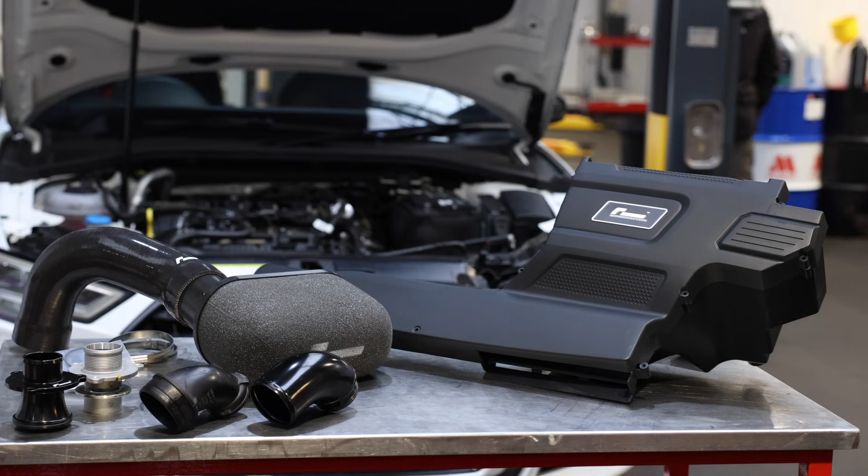Today we've got this S3 8V in with us for our Stage 2 package. On this particular car we're fitting a Revo front mount intercooler, an R600 intake package, a Scorpion sports cat downpipe along with some NGK race plugs.

Once the parts are installed, the car's going to be going into the dyno cell and we're going to be doing our Stage 2 ECU and TCU tuning. So let's get the car apart and let's get cracking.

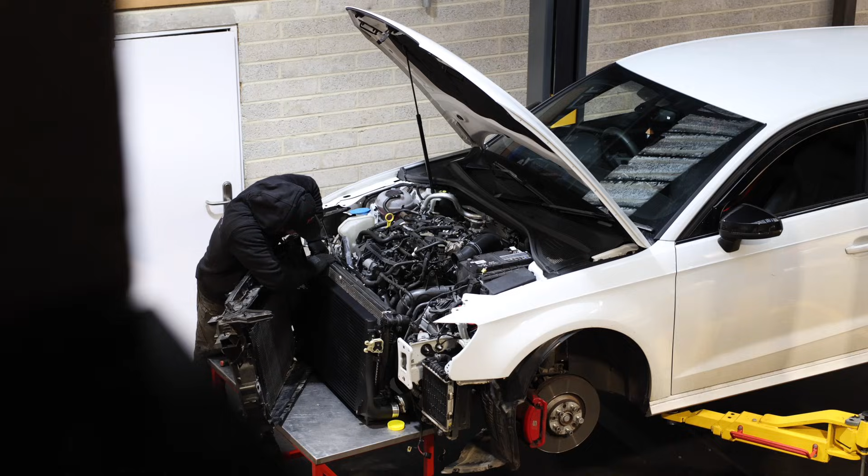Right guys, so the intercooler's installed now and it's time to fit the R600 intake package. This intake is one of our favourite intakes for the MQB platform. It performs the best and it's got a good, well-designed air box to keep intake temps down. So this kit comes with the Racing Line turbo muffler delete.

So the stock turbo in the compressor cover has a turbo muffler. This is designed to basically quieten down the noise from the turbo, but what that causes is turbulent air through the boost pipes, and it's actually slightly restrictive. So Racing Line have made this one-piece billet version, which is basically a straight through hole, so you don't get any of that turbulent air and you've got increased airflow.

So that actually does aid turbo response, and same with the turbo elbow. The stock turbo elbow is plastic, and you can see that it's very restrictive on that bend. With the Racing Line one, we've got a nice flowing 90 degrees, so the air going into the turbo can travel at a decent pace and it's not getting bottlenecked by that disgusting bend on the stock one.

So that being said, we're going to get the intake installed on the car and then go from there, so let's go.

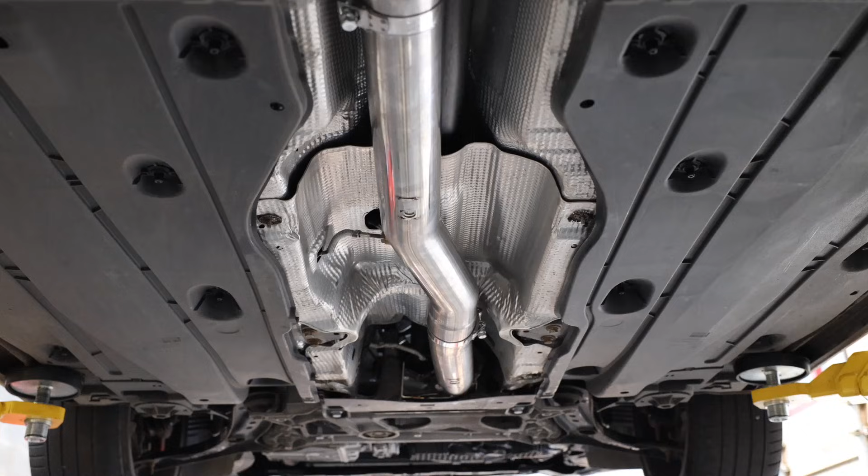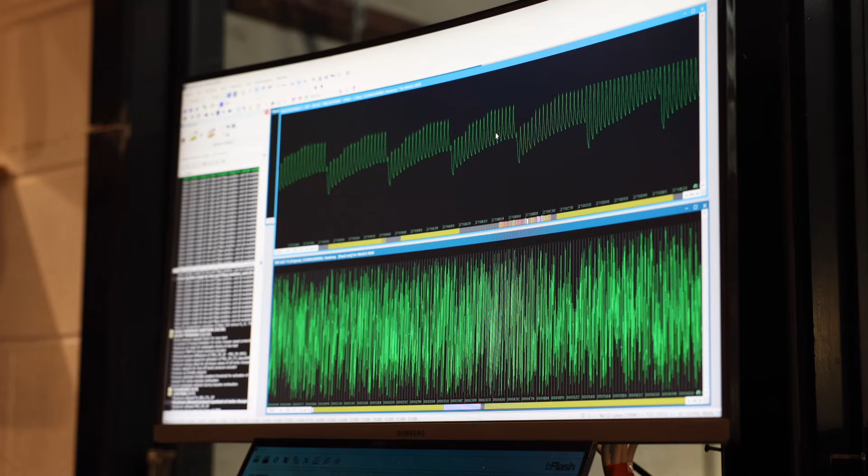Right guys, so we're going to start making a base map for the S3. What you can see on screen is a full DAMOS file for a Simos 18. That is the ECU that controls the S3 engine. As you can see, it's got like 50,000 maps inside this DAMOS file. We don't need to use all of them.

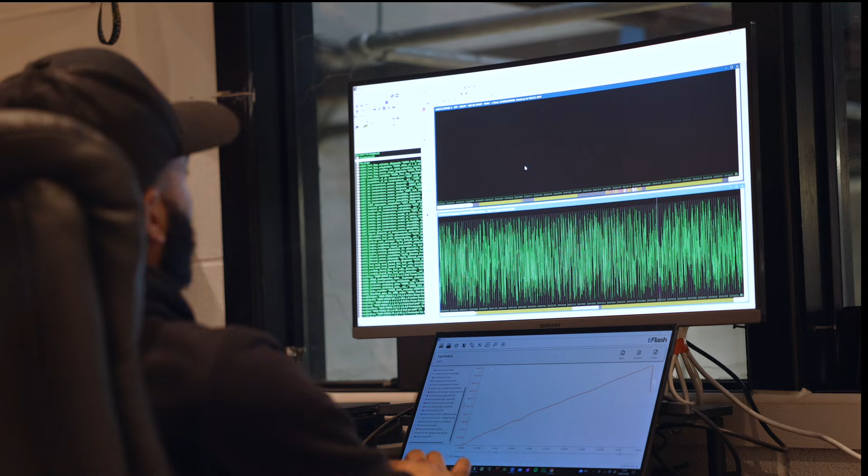So what I can do is make a tuner map pack for myself to make the tuning process a lot easier and easier to navigate the maps. So I've made a base file. I've limited the boost pressure to 1.5 bar just to get this car up and running on the dyno, make sure it doesn't have any issues, make sure it's holding boost properly, and then from that point we can start optimizing it. We'll raise the boost pressure, add some timing where needed, and we can go from there.

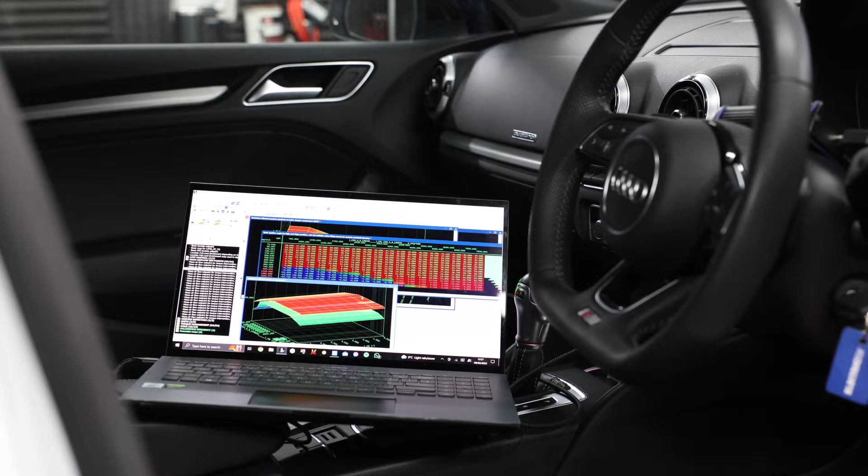So we can get this base map exported out of WinOLS, flashed onto the ECU on the car, and then we can do the first baseline pull on the tune. So let's go.

Right guys, we've finished tuning the S3 now. This particular car ran 315 brake horsepower and 313 foot-pound of torque in stock form. Obviously then we've done our Stage 2 package with the Revo intercooler, R600 intake package, a Scorpion sports cat downpipe and some race plugs.

First of all, I made a base file for this car, just running at 1.5 bar, nothing too crazy. Stock ignition timing, just as a base, just to see where we are with this particular car. And straight off the bat, it made 380 brake horsepower and 410 foot-pound of torque.

Since then, we've done another 6 or 7 revisions, dialing in the boost curve, optimising the ignition timing and fueling. So we've managed to add a bit of timing, sent the boost up to about 1.65 bar at peak, and it's making good power. The weather is on our side today. It's actually snowing outside, so the intake temps are nice and cool in here today.

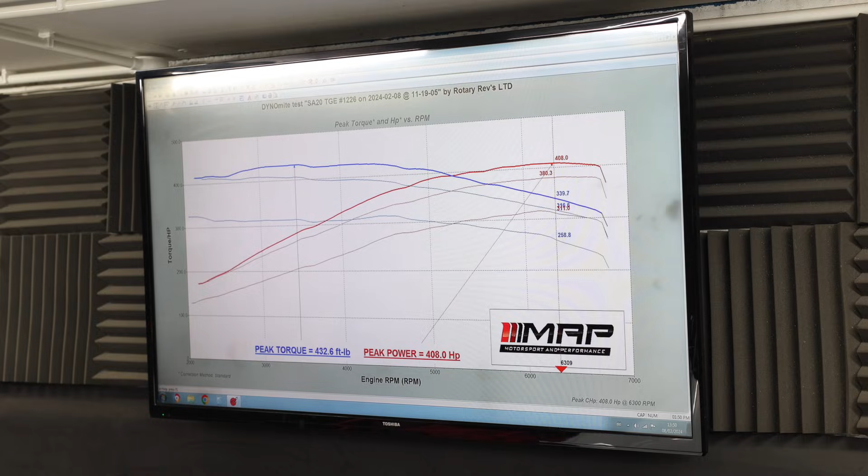We finished off on 408 brake horsepower and 432 foot-pound of torque. So the way that we like to tune these cars, we like to try and keep the same torque curve as a factory car. Don't want it spiky. It just wants to be like the stock car, but way faster. And that's basically what we've done.

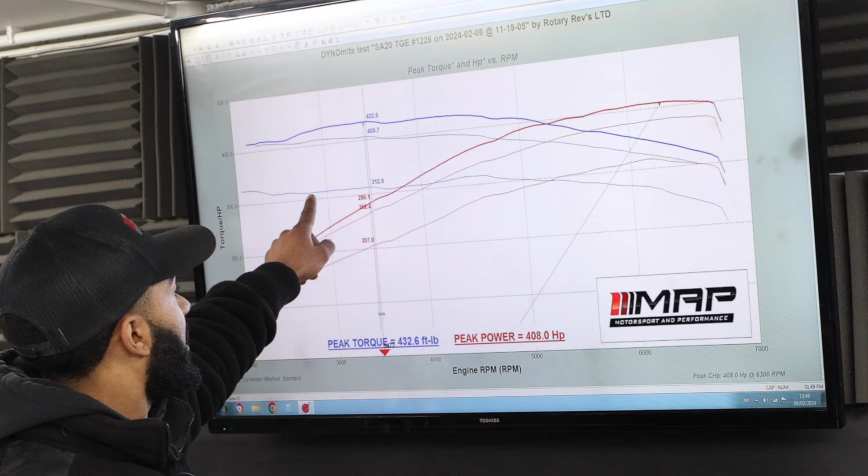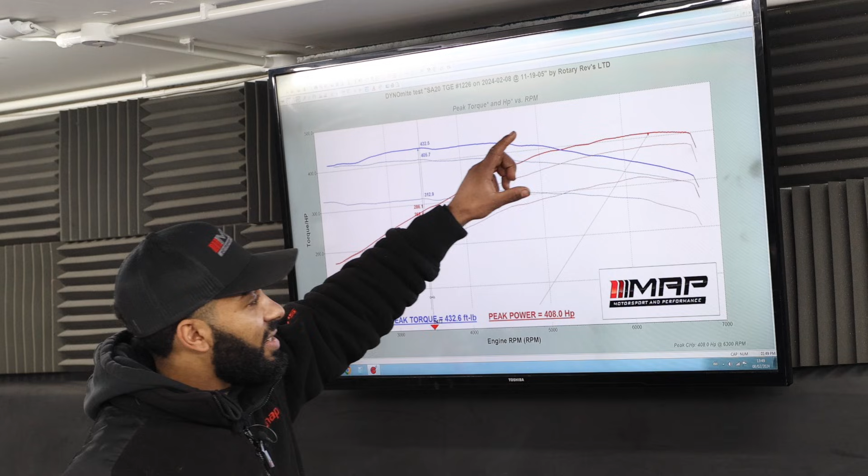So you can see here the thick line, that's the torque curve. The thin line here is the stock torque curve, so you can see how that actually follows the stock boost profile and stock torque profile from the stock car. From stock to where we are now, we've gained 120 foot-pound of torque and 100 brake horsepower at peak, which is crazy. Just from a few bolt-on parts.

To put it into perspective, we tuned an 8P RS3 just yesterday, Stage 1, and this is making more power, more torque than that, and it's obviously a cylinder less and weighs a lot less. So all in all, the car's very happy, it's behaving, and the tune is complete. So as always, we're going to take it out on the road, test it on the road, data log it, make sure the gearbox is happy on shifts, and just make sure everything that's happening here is happening outside on the road.

With this being a newer car, from factory they've disabled all the sound tuning maps, so in the older cars you've got a sport mode crackle and it kind of misses it. So now that we've tuned it, we've added the sport mode burble back in, so it's got a 2-second overrun and it's only a soft burble. It's not a sonic boom flame tune, that's not us. It's just OEM plus sport mode crackle, just like they intended from factory. So we'll put some clips before and after, so you can hear that in action.

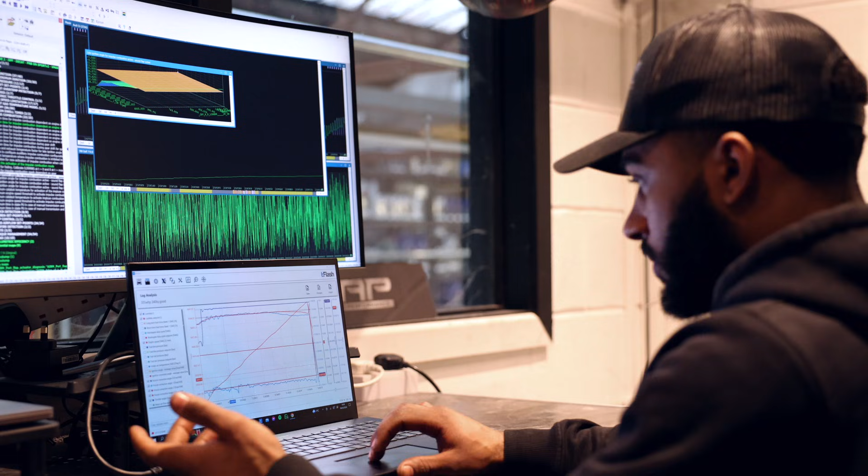So this is the final data log from the S3 that ran 408 brake horsepower. We're just going to go through the data and basically show you what we see. So first off, we can see that the boost set point is 2.6 bar on this run, and the actual boost is meeting that target perfectly. The IS38 struggles to make the boost at the top end because basically it's too small. So we do drop a little bit of boost, 100 millibars, towards the top of the RPM range, but we've got 100% throttle opening throughout the whole run, so we don't have any torque intervention.

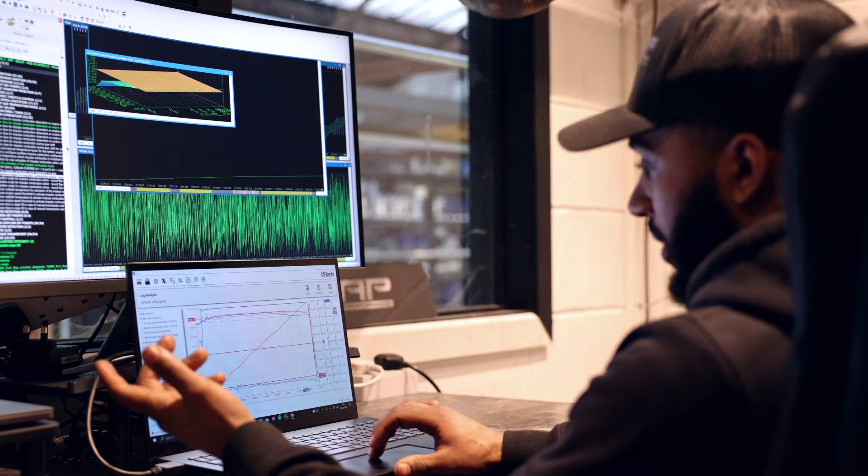Lambda is flat at 0.82 throughout the whole run, and this flat line here is actually 0, so that's the knock correction for each individual cylinder, so we don't have any knock correction at all, which is what we like to see. Revo intercooler is doing its job, so we only see 13-degree intake temperatures throughout the pull, which is good. Last but not least, the short-term fuel trims on this car never go above 3%. Basically that means that the ECU is not having to correct the fueling to meet its target lambda, which makes the engine happy.

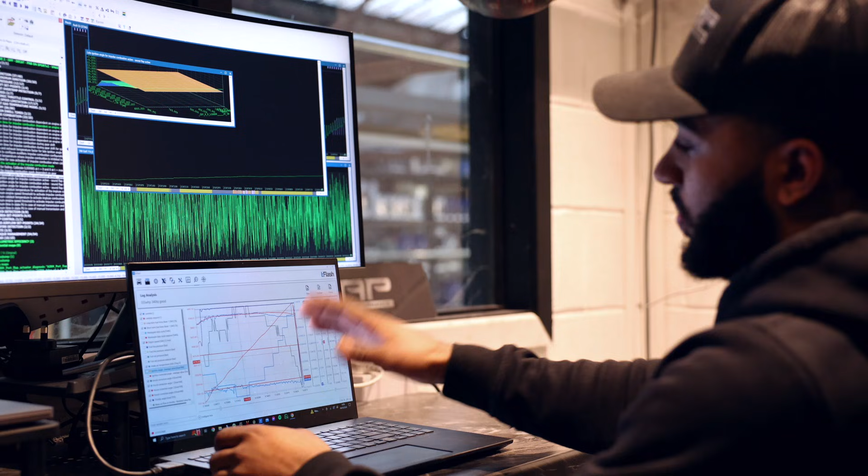So we've been out, driven the car out on the road, it's doing everything it should be doing, as much as we can test anyway, because it's snowing outside. But we've got enough data to basically confirm that we're happy with this. The data from the dyno is perfect, and the data that we got on the road is perfect. So this car is tuned and complete.